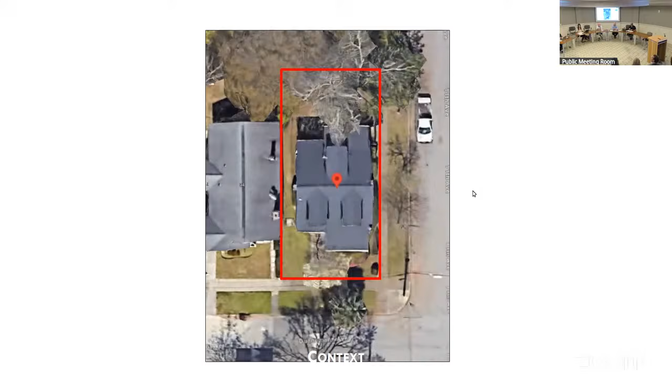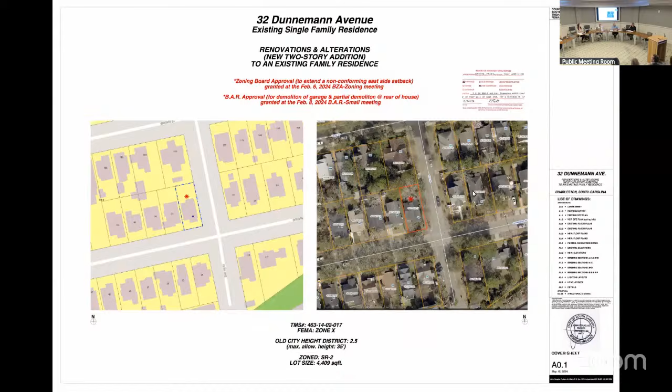This is the property on Dunnemann. Since this was after the fact, we've got a few photos from our code enforcement officer from when he did his site visit for his stop work order. And this is the condition as it was this morning. I've also got a copy — I'm not going to go through them, but I do have a copy of the approved permit drawings in case the board members need anything for reference.

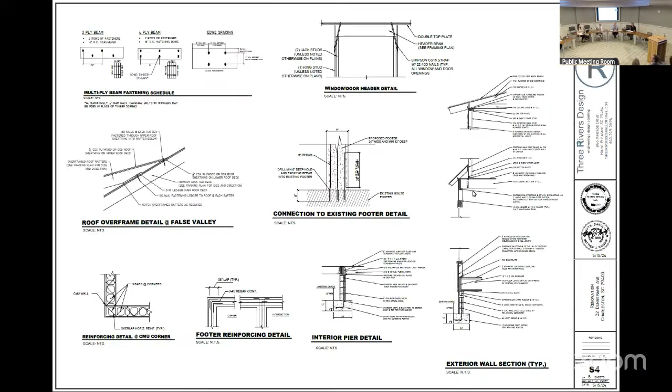You just want to skip over them to the applicant presentation. And I will turn it over to the applicant.

Hi, my name is Stan Dixon. I am the architect representing the homeowners at 32 Dunnemann. The sequence of events that has gone in play here — I want to start by just saying we have great respect for BAR and what you guys do and for Charleston, and had no intention to do anything other than to respect the original architecture of this

1957 bungalow that our clients had bought. When we came on board with this project, it had been before the BAR and it had gotten approval. A permit had been applied for and a permit had been granted. When our clients came along, they wanted to make some changes to the project. There was a previous architect that was working on this project before we started. When we started working on this project, there were some requests and changes that we made to the structure. It is completely built on the footprint that was previously granted, and it is essentially the same exact house that was previously granted for the first permit, and is the framing and the shape and the size and the massing of the house that received a permit.

When we got involved in this project, we reached out to the city, and we also reached out to the BAR, and we were told exactly what type of permit to apply for by the city. We did that. We followed their instructions, and we did get a permit to start construction.

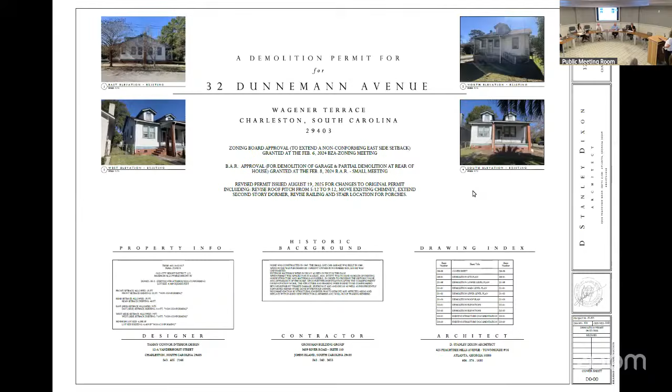Anything else to add to that, Karen? We do have... photos in our... You should state your name. I'm sorry. Lindsay Dixon, architect.

These are some photos of the house prior to our involvement, prior to demolition, and then photos of the termite damage and subsequent structural modifications done by the previous owner, where floor joists had been severed and were unable to be reused for the safety of the occupant.

Any questions for the applicant? I've got a couple. So when did you guys get involved with this project? What time, what year? I think it's probably June of 2020. Yeah, June of 2025, I believe.

And we were informed in August that the additional revised permit application had been approved.

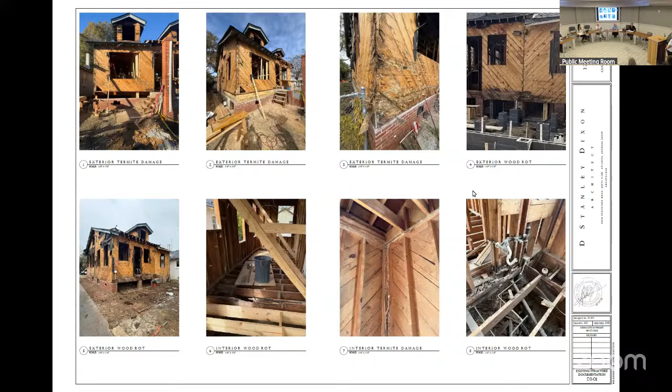Okay, and I don't think this project had aluminum windows. I'm looking at a photo from 2024 of wood windows. There were both some wood and aluminum. You can see on the upper floor, the second story was aluminum. The lower floor were wood windows, which we have used as our precedent to replace all the new windows with.

And so the drawings that we have show removal of all the siding, all the windows, the chimney. Was that approved? Yes, that was approved by the city to remove all of the exterior siding, porch, chimney. Okay, so we don't have the proposed drawings somewhere? The city approved it? No, sir. The building department approved it.

Excuse me, the permit was not issued because there are three departments that review: the building department, the zoning department, and the BAR. BAR did not approve. So you didn't have an approved permit. You had a building department approval.

But you didn't have a BAR permit. Confirmed yesterday, they didn't have a permit. They had a permit to do the original rear addition. Okay, it does belong to the demo in the rear. Got that.

Just clarifying, so the drawings that we have that show wholesale removal, I mean everything has been removed from this building, were not approved by the BAR. No, sir. Okay, that's all I need.

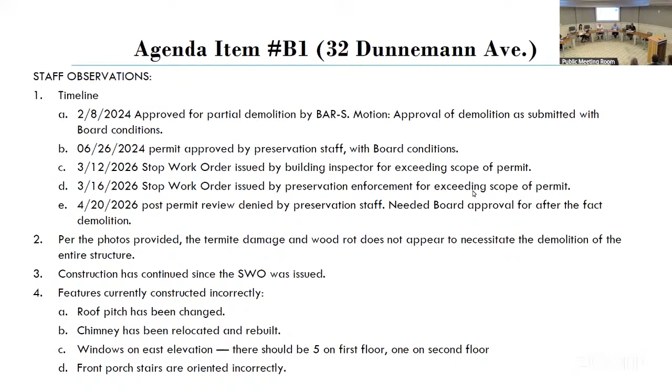All right, we have a motion on the floor for deferral to research the permitting issue. Do I have a second to Eddie's motion? I'll second. Bill, put the motion to a vote. Daryl, yeah, in favor. Eddie, yeah, in favor. Bill, yeah, in favor. The chair votes the majority, and the motion passes unanimously. Thank you all.

Agenda item 2, 399 Sumter Street. Frankie, if you'll give us an introduction overview of the project, please. Let me give you one second to finish it.

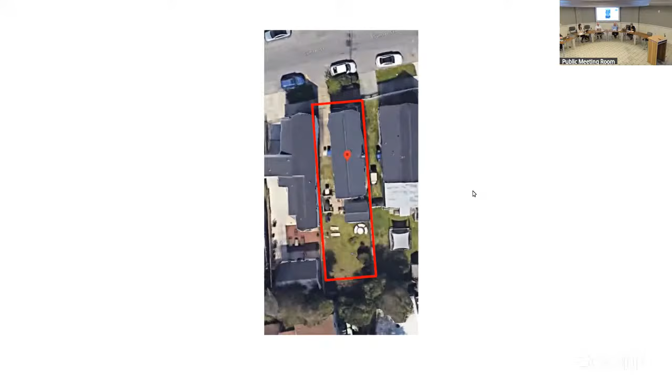Next we have 399 Sumter Street, West Side, Council District 6. It is a Category 4, Group 1, circa 1915 in the Historic Materials Demolition District, requesting an appeal of that decision for a replacement of 6 windows with Renewal by Andersen. This is the property's location on Sumter. I'm going to turn it over to the applicant.

The applicant here, I believe, with the applicant, he's my general manager at Renewal, but I thought Mr. Zawada was here. I am here. Oh yeah, I didn't see him. Did you want to say? Oh, I can present. Just something, if no one's here, I need to defer it to give you an opportunity to speak, so you don't have to say much. Oh yeah, Tom Zawada, I'm the homeowner.

Maybe we're just looking for a durable, well warranted, well reviewed window. Basically just looking for something we can open up during the fall and spring, so we can have open windows and let air in.

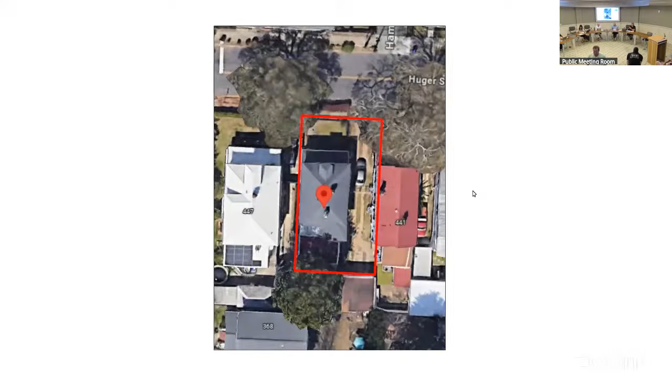This property's location, go ahead and go. You can go ahead and stand up, sorry. And I'll turn it over to the applicant.

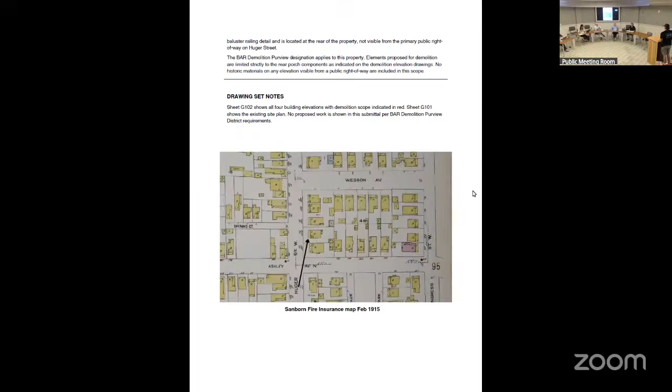I'm Ryan Sanders with Old City Builders. We're the builder for the customer. We're requesting to demo the existing columns here on the back porch, as well as the railings and pickets.

It's our opinion that they're not original. They're square 2x2 pickets, 4x4 post columns. This whole portion of the house is, in our opinion, not original. It's not the original portion of the house. So we're requesting to demo this area and essentially the shingle roof on that area as well.

We will be reusing those existing windows. So these two that are here, these are original. As far as I can tell, they're wood, single pane, putty glazed windows. So our plan is to reuse those.

Any questions for the applicant? Okay, thank you. Do we have anyone speaking?

Laurel Fay with the Preservation Society of Charleston. The PSC appreciated the opportunity to visit the site this morning, where we noticed that this demo area would be visible from Ashley Avenue. While we always encourage retaining historically open porch spaces, including the existing back porch, which was original, we acknowledge that there can be flexibility for alterations at the rear, and we appreciate that the applicant voiced the intent to salvage and reuse the 2/2 historic windows proposed for removal, and ask that that be included as a condition. Thank you.

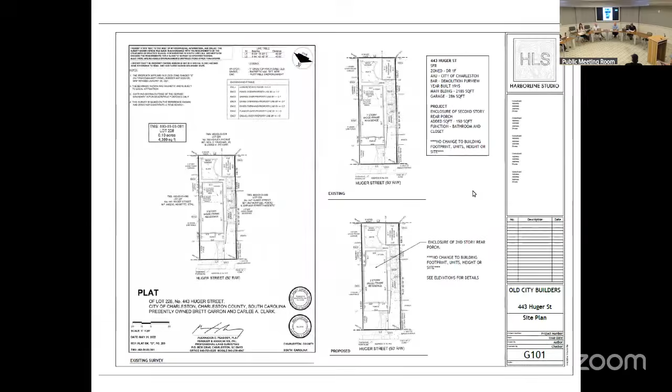Staff observation: request includes demolition of its existing second floor rear porch elements, existing wood baluster, porch decking, exterior wall framing, and trim, while the rear eave is being removed from the drawings. It appears that the porch roof is not included in the request.

So this doesn't appear to contain any approval to interact with the roof fabric. Area of demolition also appears to be later than the structure. Staff condition for approval: if approved, project would need to wait the 30-day appeal period before the permit can be issued. Staff recommendation is approval as submitted.

Thank you, Frankie. Did you want to respond to or clarify anything in the public comment or staff comments and recommendations? As far as the roof fabric, in an ideal world we would pull the shingles back, but if it's desired by the BAR we can build on top of it and leave the existing there. The framing will stay there, the sheathing will stay there. But as far as the shingles go, we plan to remove them, but if it's desired to leave them in place, we can as well.

You're just gonna do an over-frame. Correct. Thank you. All right, public comment and the applicant's presentation is now closed. We'll move into board discussion and a vote.

If you crane your neck, you can kind of see it from Ashley Avenue, but it's not strongly visible. The demolition is to the rear, where we usually like to see it. I think the porch has kind of lost a lot of its integrity with the infill of the downstairs porch and the one-story addition put on the back. So I'm comfortable with this, and too, I think the impact to the street, public right of way, is minimal.

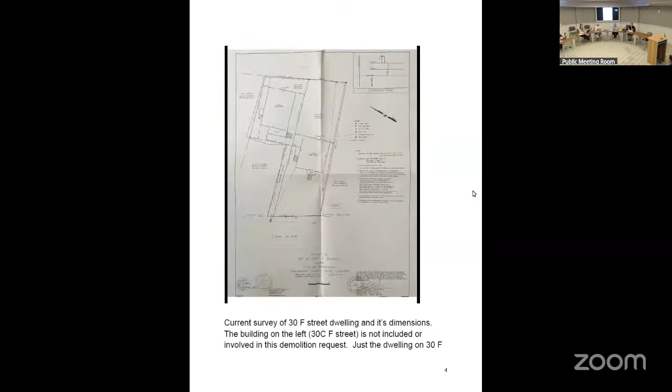I just have two observations. One, staff did verify that our information was that there was a structure that dated to 1974, which is what put it under purview, and staff typically does not support full demolition. However, if the board does decide to approve, the project would still need to wait the 30-day appeal period as required by ordinance.

Since staff does not support full demolition, our recommendation is a denial as submitted. But I know there were some comments. Thank you, Frank, did you want to respond to or clarify anything? Yeah, before we move into board vote.

I don't mean to - I'm sure your staff does a great job, but I'm a little confused on the '74, with all the paperwork that I have. And that's not just me, that's people that work at Sanborn and everybody. I know there was a home on that site, but it's in a totally different position. I don't think we're talking about the same one.

That's all I can say, I guess. So to add on to that, and I don't think it's gonna matter, but the article I'm reading about five zoning ordinance variances approved says construction of a one-family dwelling at 30 F Street, which I assume is this house. Do you think that was approved? That's 1974. And so that was a house that was lost in Hugo, is what you're saying.

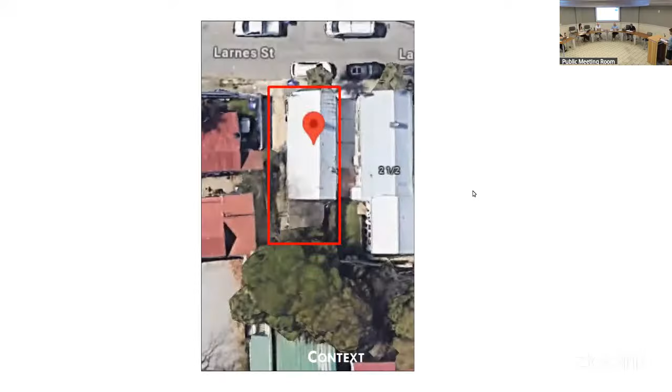And item 5 is 2 Larnes Street. Frankie, if you give us an introduction overview of the project. Okay, 2 Larnes is in West Side Council District 6. It is a category 4, circa 1905, in the Historic Materials Demolition District. They're requesting approval for partial demolition of exterior elements visible from the public right of way. Here's the property on Larnes Street, and I will turn it over to the applicant.

It's not lost on me that this is not something you guys typically would approve. However, due to the significantly small nature of the lot size, we're really very limited in what we can do to make this a practical, useful space — it's essentially a one-bedroom home. The homeowner is working every which way to try to make it a little bit more useful. So that being said, the demolition is confined to the rear of the structure, preserves the large majority of the historic relationship of the cottage and its relation to Larnes Street. As I've mentioned, the demolition has been intentionally minimized to the best of our ability.

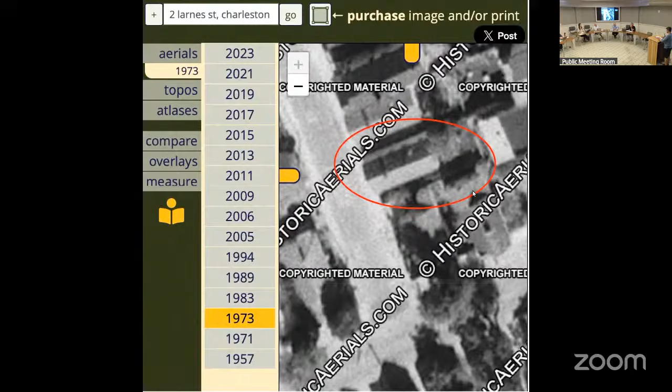Okay, so staff had some observations. The request includes demolition of a porch, siding, trim at the rear, and a portion of the roof. The existing structure is a Freedman's Cottage. The request is to the rear, but due to its location, the rear is visible. We noticed a discrepancy between the drawing and the photo request — we think the entire rear elevation is requested for demo.

Is that correct, the rear-facing side? The rear side, yes. I think there might have just been a drawing error, or an error between the drawings and the photo you marked up. Okay, staff is not opposed to the removal of the screen porch.

We are concerned that a demo request would require removing the entire roof, as applicants have stated before that there's not a way to splice into the historic roofs, the terne metal roofs. Staff has previously supported small portions of demolition at roofs such as this for dormers. While staff doesn't support roof demolition, if the board were to approve, we think it should be pulled away from the rear chimney.

Also, if the board were to approve, the eaves and the rear corner board should be retained in the same project. If approved, the project must wait a 30-day appeal period prior to us approving. Staff recommendation is a denial.

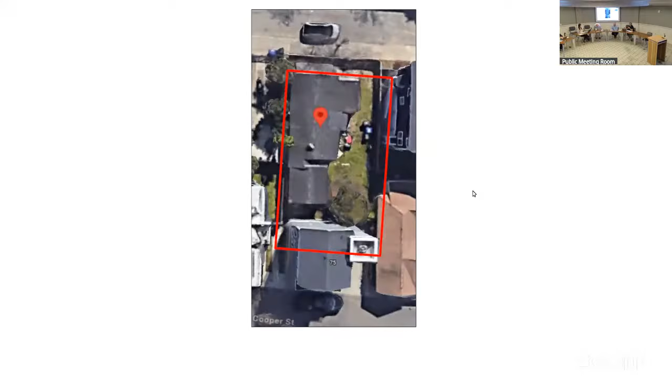Eight Shepherd Street is in East Side Council District 4. It is a category 4, circa 1920 property in the Historic Materials Demolition District. They are requesting full demolition of the existing dwelling. This is the property's location on Shepherd. And I will turn it over to the applicant.

Is the applicant here for 8 Shepherd? Yeah. My name is Robert Shipley. I'm the architect and probably the builder. The client bought this property - he actually lives right next door and looks right out at it.

When it came up for sale, he wanted to buy it, and he knocked it down. It's in pretty rough shape - I guess you went out there today and looked at it. I told him it could be charming if we fixed it up, made it a nice little place. He did a lot of work - I don't know if you looked underneath the crawl space, but it's used like bricks and concrete block, floors all over the place. So it would be better to just knock it down and build a nice new home there.

Any questions for the applicant? Thank you. Good. We have anyone speaking from the public?

Hello, everyone. I'm Antonio Coxum, representing the Eastside Community Development Corporation and its board. We have our president in attendance right now.

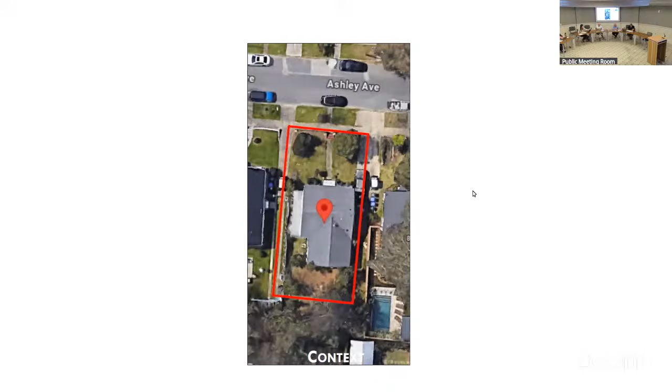872 Ashley is in Wagner Terrace, Council District 6. It is category 4 in the architecture inventory, circa 1940, demolition district. This project is requesting an opt-in review for demolition of existing exterior elements visible from the public right-of-way and conceptual approval for a proposed addition. This is the property's location on Ashley Avenue, and I will turn it over to the applicant.

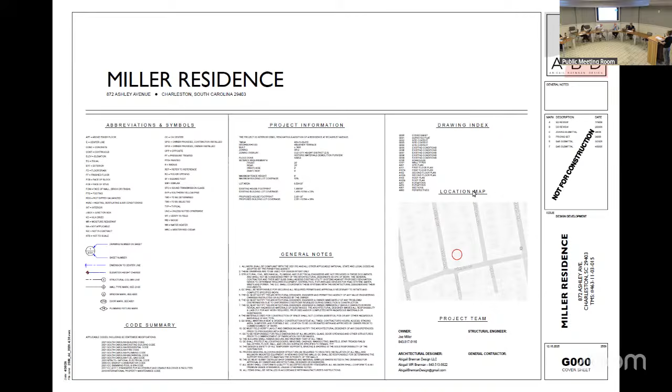Good evening, I'm Abigail Brennan, the architectural designer speaking on behalf of the owners, Joe and Rebecca Miller. This property is a typical lot within Wagner Terrace.

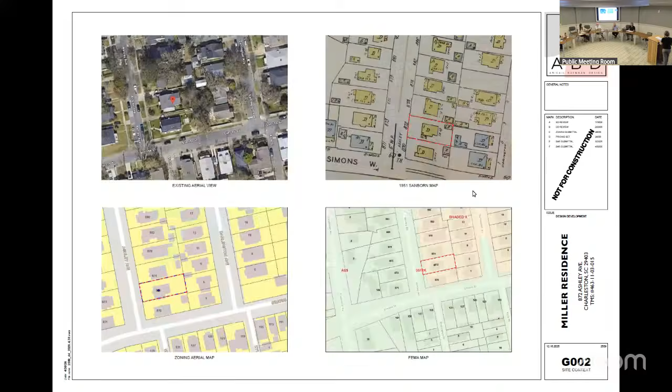The existing structure has undergone alterations over the years, including vinyl windows, aluminum siding and trim, and a metal awning at the front. We are proposing to remove the aluminum siding and restore it, replacing in kind with the existing wood siding and trim.

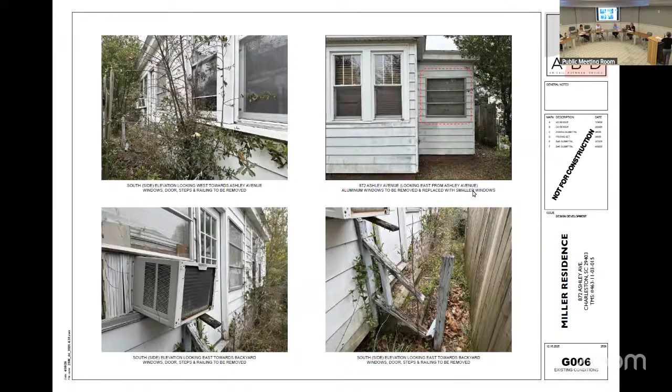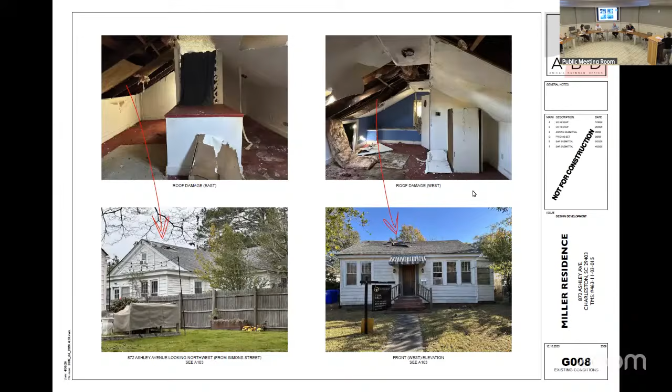These photographs once again show the extensive roof deterioration and water intrusion throughout the structure. We are proposing a modest single-story addition in the rear.

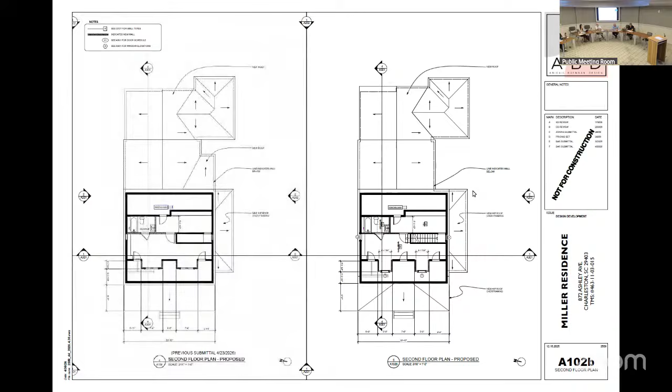In plan, you can see that this was the original width of the dormers, and now we are making them narrower. The proposed dormer area that we're modifying is 8% of the historic roof.

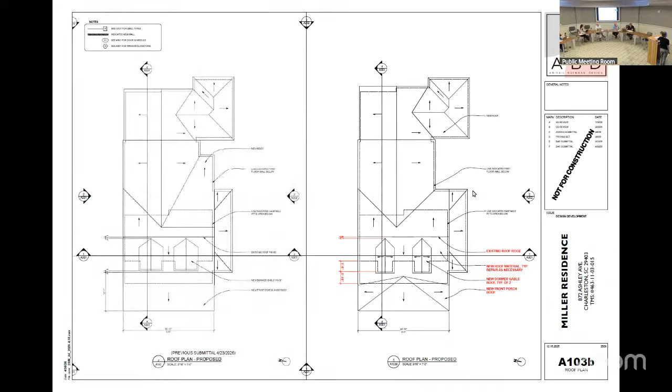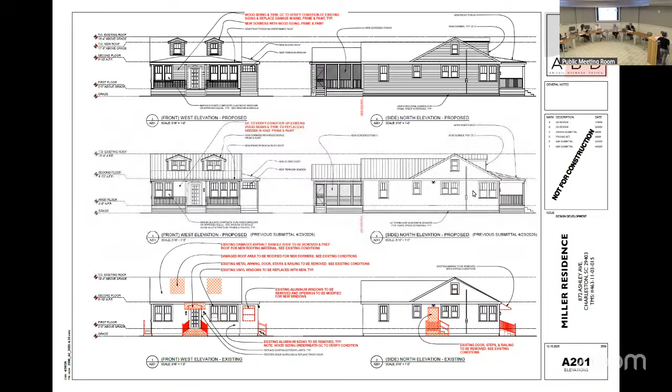And then we have exterior elevations. In response to feedback received at the previous meeting, we reduced the width of the dormers to create a more modest appearance. They remain pulled from the roof edges and below the primary ridge line. We also revised the front porch to make it a hip roof, creating a lighter and more subordinate appearance. The rear addition remains clearly secondary to the original structure, with the new roof tucked beneath the existing eave. The side elevation also shows the lower roof line, highlighted in pink, though it's hard to see, but it occurs right here in the addition with the low roof.

And then we have section drawings, and perspective drawings showing how it transitions.

Our goal is to preserve the character of the original bungalow while making it functional for a modern family. The addition remains subordinate to the existing structure while creating a more welcoming and engaging presence on Ashley Avenue with the front porch.

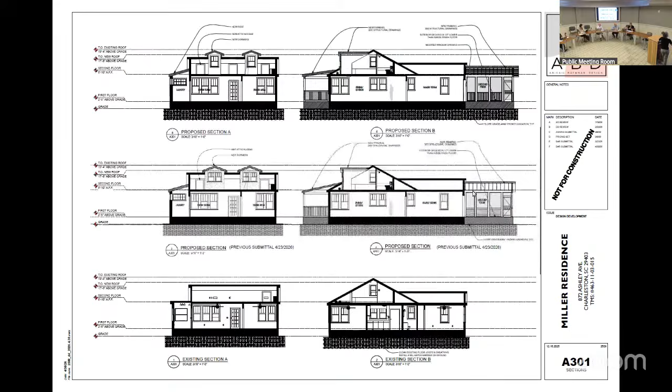First of all, thank you for the excellent submittal. It's probably in there and I missed it, but can you explain what the new porch you're adding, what the base is? Is it just slats of wood or something else? It'll be block. So there'll be piers, but with wood slats that'll be continuous across the front, that's what you'll see. So we're playing with a very simple front porch, nothing like brick piers or anything that are gonna be visible, just keeping it small, minimal, modest. Thank you, just wanted to be clear on that.

Thank you, any other questions? Thank you. Do we have anyone speaking?

Laurel Fay with the Preservation Society of Charleston. The PSC is pleased to see the improvements to this design made possible through the opt-in review process. We appreciate the responsiveness of the owners and applicant to our feedback regarding opportunities to draw from neighborhood precedents to inform the design approach, and we look forward to seeing this house receive much needed preservation attention. Thank you.

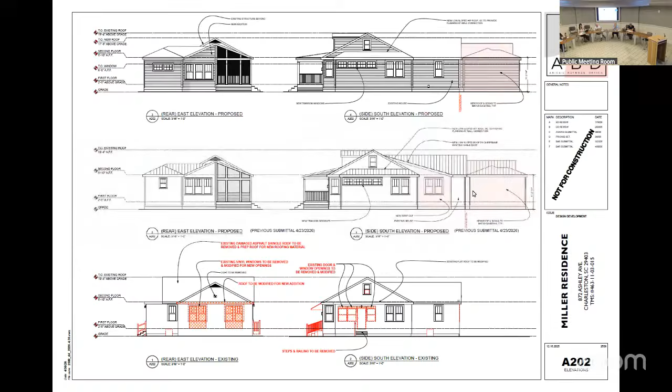Frank, you have the rest of these staff comments and recommendations, please. Staff just have observations for previous board motion: the approved dormer size and proportions have been restudied and the bump out has been eliminated. Staff has no additional comments, so we are recommending approval of demolition and conceptual approval with preliminary final review by staff.

Thank you, Frankie. Ms. Brennan, do you want to respond to or clarify anything raised in the public comment or the staff comments? No, that is okay. All right, public comment and the applicant's presentation is now closed. We'll move into board discussion and a vote.

You did everything we asked. I think it's improved greatly. The elimination of that bump out on the side has gotten rid of that really awkward ski slope roof configuration, and I think the hip roof on the porch has helped a lot. I think you've also beefed up the columns on the front porch, it looks like.

They're more substantial now, so I think everything's moved in a very positive direction. I'm in agreement with staff, I don't have any issues. No, I think it's great. Daryl, do you want to make a motion?

Make a motion for conceptual approval with preliminary and final by staff. I'll second. Okay, so your motion was approval of demolition, and conceptual approval. Thank you, Daryl, and thank you, Eddie, for the second. Motion to vote: Bill, yeah, in favor. Daryl, yeah, in favor. Eddie, yeah, in favor. Chair votes the majority, and the motion passes unanimously. Thank you.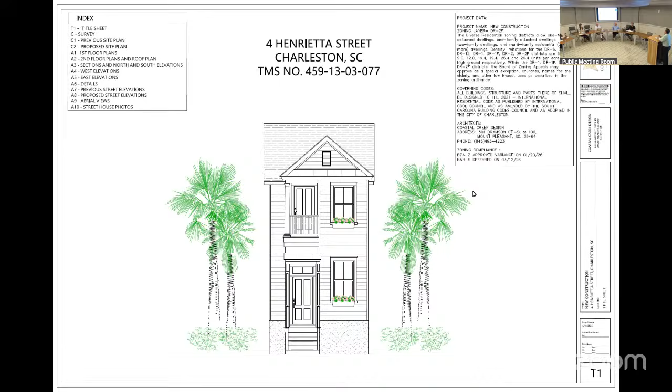That's the current proposed front elevation. Here was our previous site plan that you reviewed, and we had basically just two masses: a front piece and then this long finger going through the back. We have revised that and created a house that reads, I believe, as three sections as it extends to the rear. There was concern by one of the neighbors about how deep the house was.

So when you look here on this current proposed, we've shifted everything forward 5 feet 4 inches further off of that rear property line to address that comment. We skinnied this thing up and removed that variance request that took us 8 months plus to get, so that we could do tandem parking versus parking in front.

When we look at this, we are still looking at trying to create the image of a double piazza on the front. We had a single front, quote unquote, front porch on the previous design. You'll see that the house is a little more slender, a little bit longer, but it's definitely still pulled forward. Those cars will park on that left-hand side.

One of the concerns was also size, scale, height of the house. The size of the house was taken out about 137 square feet in the overall footprint—footprint, first floor, second floor. And we reduced the height, as you'll see as we get to those elevations, by about 2 feet 3 inches, basically taking our first floor from 10 feet to 9 feet, second floor down to 8 feet. Changed that roof pitch to pull it down.

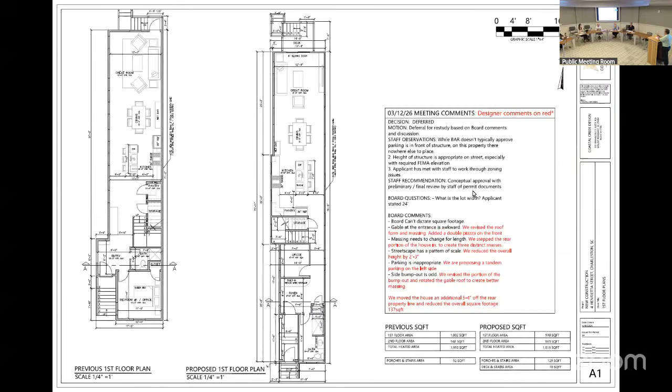So the first person that spoke, I guess I'm confused as to the parking issues. I know that's not your purview, but there was a duplex next door to it as a single family residence. Just because this lot was used for parking doesn't mean that it has to remain parking. We're providing the required parking for the structure that we're proposing, and did not increase the square footage.

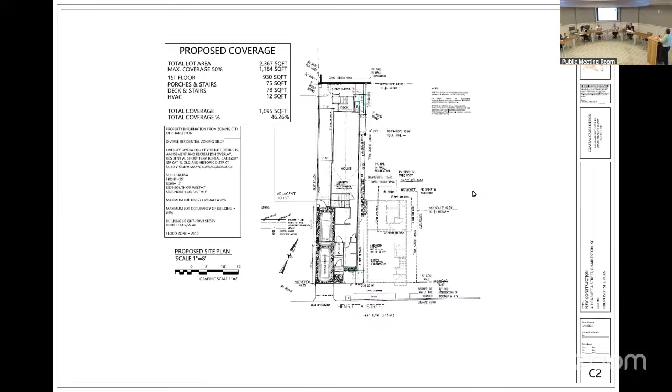The house that we're proposing is 1,800 square feet. When we did our presentations to zoning board at previous meetings, we had documentation that showed the square footages of the houses around, and this house is appropriate in this neighborhood. She may have cited the small houses on her side of the street of Henrietta, but when you look at the other houses, the house at 6, the house at 10, and the houses on Elizabeth Street, this neighborhood is not full of houses that are 1,000 square feet. We have a lot that has a TMS number that is allowed to be built on.

I think that we took the board's comments from that first review of this. We reduced height, we reduced the width, and I'm certainly willing to restudy the piazza if we need to. But I think that the house again takes its cues from the neighborhood as far as the detail.

Thank you. All right, public comment and the applicant's presentation is now closed. We'll move into board discussion and a vote.

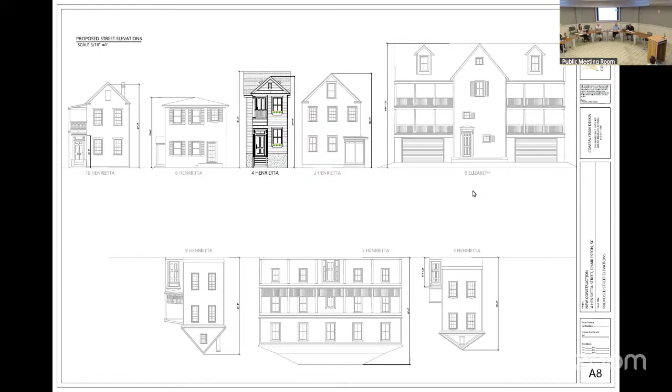Thank you. Agenda item 9 is 3 Savage Street. Frankie, if you'll give us an introduction to the project.

3 Savage Street, Charleston, Council District 8. It is not surveyed, circa 1890, in the old historic district, requesting a conceptual approval to elevate the building, site and fenestration alteration. Property's location on Savage, and I will turn it over to the applicant.

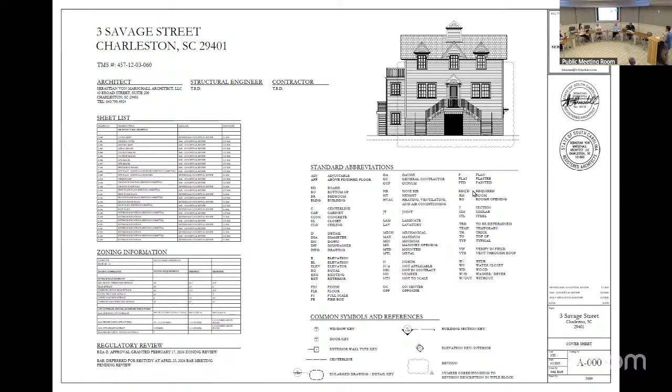For conceptual review of the proposed renovation at 3 Savage Street, the board will remember this project was reviewed at the April 23rd meeting. The house is a former carriage house dependency for a different structure it backs up to, as you can see in the old Sanborn maps. There was an early 20th century house on Rutledge Avenue, and the carriage house beyond that.

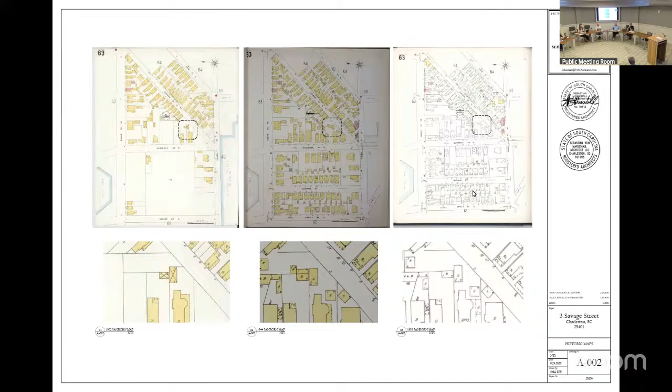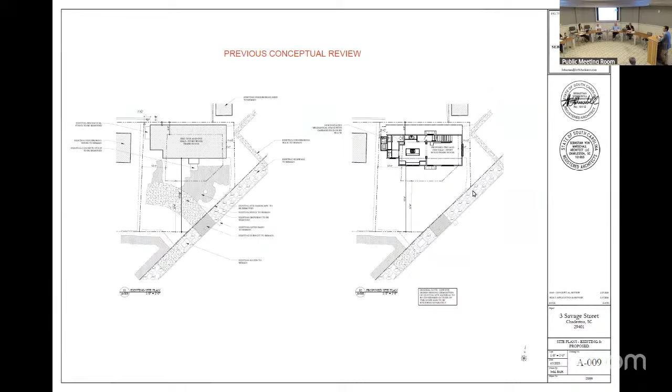You can see some aerial images, site and context pictures of adjacent structures, and the house itself, including the front door aedicule, which was the crux of our conversation at the last review. You'll see our previously approved and proposed site plan, which shows the major modifications we discussed that address the majority of the board and staff's comments, namely the location of the front door and the treatment of the historic front door material.

You can see the site here. One thing that was discussed was the amount of space, and in further study we determined there was sufficient room to add a stair on the front of the house, which allowed us to solve a lot of the other issues that came up during the previous meeting.

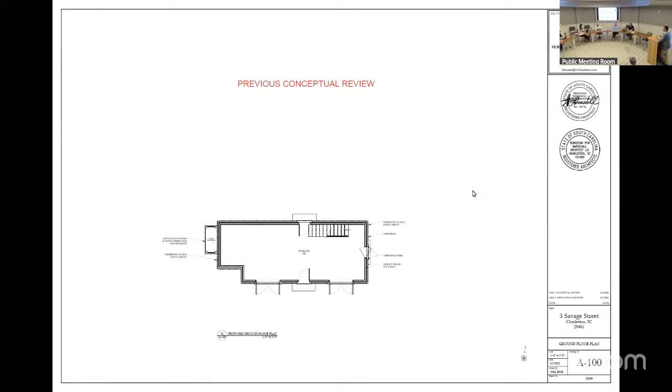Here you can see the height comparison of our proposed structure, which even elevated is well below the adjacent buildings. Previously approved ground floor versus revised ground floor, with the stairs on the front of the structure. Previously reviewed versus the first elevated floor with stairs.

I'm going to skip through to get to the elevations, since they tell part of this story. This was the previously reviewed version of the proposed scheme. We had talked about relocating the original front door over to the side facing Savage Street and replacing it with a new door on the south side.

The proposed version keeps the existing historic door in its location on the house. When the house is elevated, stairs and a front stoop would be added to handle the vertical change, avoiding the complexities of an internal stair. It also preserves the historic material on that side of the house and the door aedicule, reinforcing the narrative of the evolution of the house through this renovation and elevation.

I think this is probably the best elevation, but I'll quickly flip through some others. Previously reviewed, you can see where that aedicule had been moved aside, and now we're proposing a new side door that's compatible with but not competing with the original. On the rear elevation, we're still proposing a door on the north side for access to the area below the house in the elevated space, with the door, window, and stairwell above.

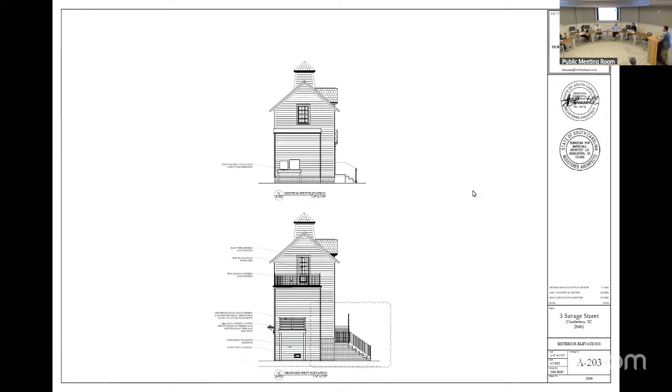We have letters of support from the neighbors, which were added to the record at the last meeting. We also shared our revised drawings with the preservation groups, and we're generally very comfortable with the direction it's going. I welcome any comments, and thank you for your time.

Questions? Can you help me understand, Sebastian, where it's being moved? I didn't really understand the change. Yes, sorry, let me quickly back up to our site plan.

This went through the BZA, and the house currently sits very tight to the north property line. Because of the elevation and its impact on surrounding structures, and other concerns, the proposal is to shift the building south to meet the north setback zoning requirement. This lot is extremely challenging, so there was no way for the structure to meet all the setbacks, but we tried to help it meet at least two, north and south. This also gives relief to the neighbor on the north because of the added mass from the elevation, and it helps with drainage and buffering.

I went out there today, there's a big tree right there. Are you going to have to cut the tree? No, we're not able to cut or move large trees around it. Okay, thank you, I just wanted to clarify that.

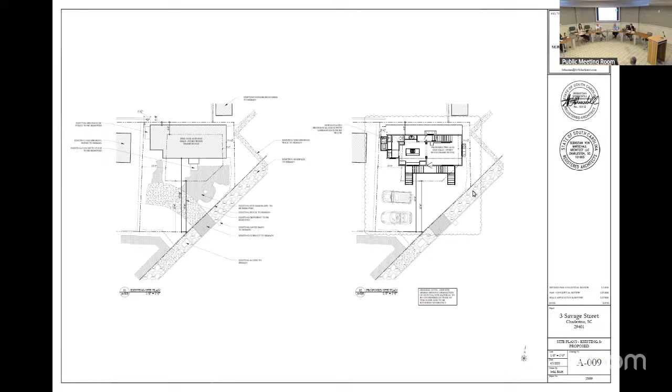Staff just have the observations that previous board motion and comments have been addressed, and staff has no additional comments. Staff recommendation is conceptual approval with preliminary and final review by staff.

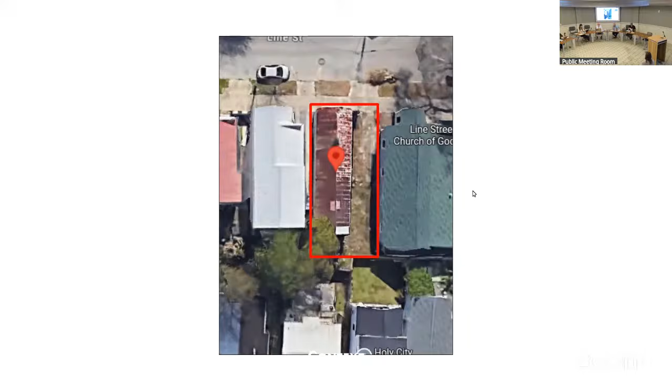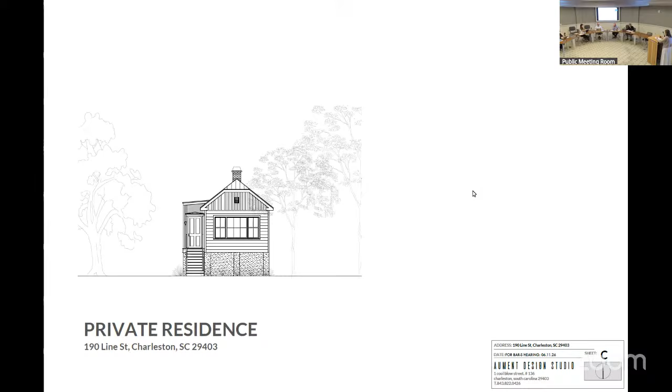Hello, I'm Amber Aument and I am representing the owner at 190 Line Street. I'll start by saying I was approached in April to take on the reconstruction of this structure. I was really reluctant to do so, given this storied past. However, meeting with the new owner, I felt this parcel finally had a good steward, one who was committed to replacing the cottage as it stood. And that was a project I was very much interested in and lucky to be attached to. So on C1, these are images taken before the structure was lost.

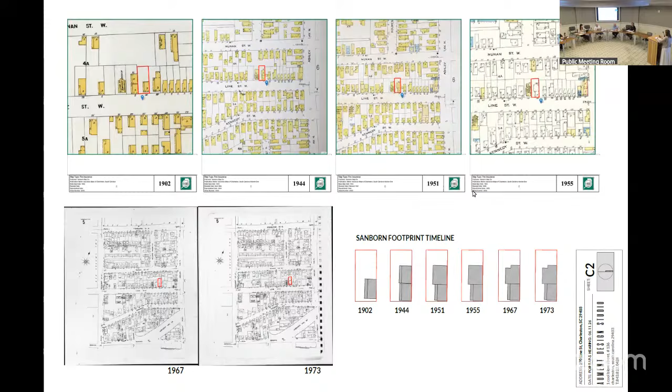Here are Sanborn maps that South Carolina Room researchers helped me find. You can see there was quite an evolution of footprint over the span of the structure. From 1902 to 1973, it really grew in form, but what always remained present was the gable facing the street and the side piazza, which was present in the last batch of photos we have on record. So that is what we are aiming to reconstruct.

Here is a submittal timeline, both pending and previous board hearings, so you can see those decisions. Again, I was approached in April, shortly after the last time this was before the board, where the decision was denial based on an insufficient submittal.

The proposed submittal strategy presently is to recreate the footprint based on the Sanborn maps and to utilize the inventory from the SOS survey, where there was a very impressive documentation of materials and massing.

The fenestration along the piazza was boarded up before the structure was lost, so these locations are speculative and made on the basis of rhythm and repetition between the column bays. The remaining comments from previous hearings have been addressed to my best ability.

Here is that extensive inventory done by SOS Charleston. This was really crucial in how I approached reconstructing this structure. It was really prescriptive - the work was done for me, really. They also had some additional photographs that helped support that documentation.

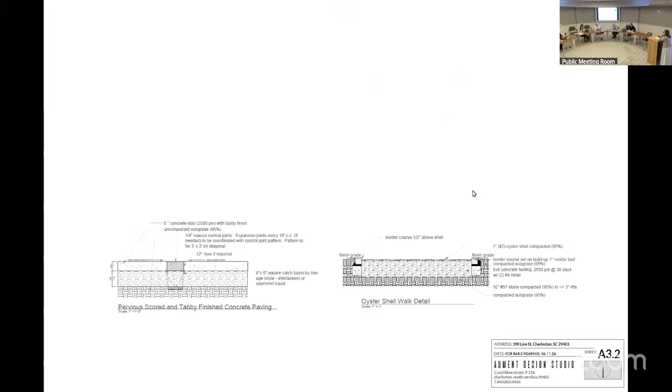So you don't need breakaway walls if it's just in an AE zone, it's not in a V zone. So then we would just have continuous stucco. Yeah, I didn't realize that was going to be one of my comments.

This is a comment for the board. Did the board say to push the piazza back from the original? Because it was originally 8 inches off the facade. Is that something the board said before? I think this is the first time we might have a complete application, so every time we've said that, you're piecing it all together. That's right. Every time we've said come back.

I can help a little bit. It was not something the board got far enough into. Okay. Amber did talk to us about it and we said, you know, so that was sort of a speculative thing. I don't really know. Okay, that's all, I'm just curious.

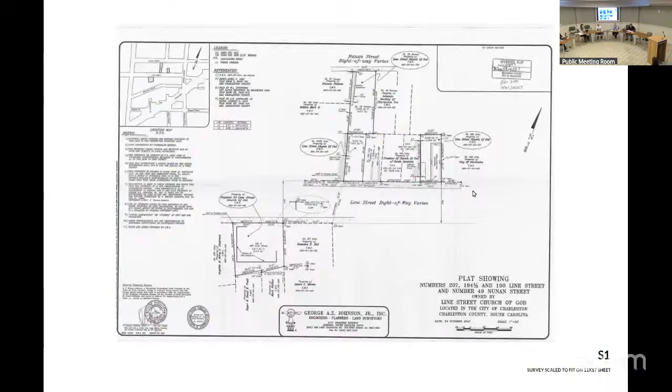Anyone else speaking? Frankie, give us the staff comments. Staff have the observation that we appreciate the attention to detail in the new submittal package and believe that the current submittal accurately reflects the previous structure while meeting the code requirements for elevation. Since this was a code case, we would need the board motion to include a timeline for submittal of permit documents. Nothing to do with Amber or the current owners, that's just standard practice given how this all started.

And so I wrote this very carefully and I think I've got this right. Staff recommendation for the motion is a denial of after-the-fact demolition, but approval of drawings for reconstruction with staff conditions. Did you want to respond to or clarify anything in the public comment or staff comments?

Explain to me the timeline of submittal. We have been told that whenever we have a case that has a code case component, the board has to set a timeline, whatever they deem necessary, for a new submittal to come back. It feels kind of silly in this case, but we don't have to see it back. No, I mean like for submittal of the permit or whatever her next step is, it just doesn't rest in limbo.

That's it. All right, public comment and the applicant's presentation is now closed. We'll move into board discussion and vote.

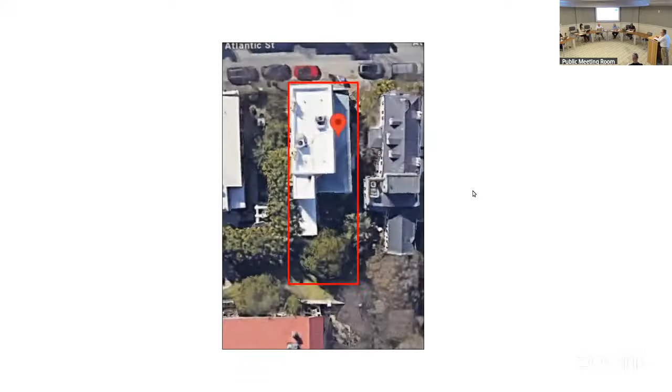Agenda item 11 is 6 Atlantic Street. You'll give us the introduction and overview of the project, please. Hello, we wanted to introduce this, it's 6 Atlantic in Charleston, Council District 8. It is category 3, circa 1830, in the Old Historic District. They're requesting conceptual approval for renovation and addition to the rear structure.

Project location on Atlantic. I will turn it over to the applicant. Who's gonna go first? Well, just a little bit of background. So we did get approval from BZA for a hardship of insufficient kitchen, really, if you look at the plan of this house, it doesn't really have a kitchen commensurate to a house of this size. But that was in December.

And then 6 weeks ago or so, we presented basically the full program that the client wanted, and this is essentially represented here on the front page, which included the new kitchen. There's also this pantry area, which was commented on during the review.

So these two elevations show the revisions in response to the last BAR review, where we basically removed the porch enclosure pantry area, and also we're trying to make the

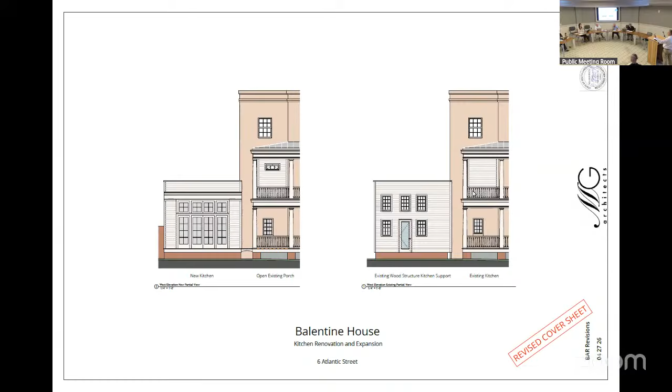building... the original building was there for a long time. It's on the Sanborn maps from 1888. It's probably been worked on, it's not a pristine building, but its scale - and that's been commented on by the Historic Society and other people - is basically what it was. There were comments to try to preserve that profile, so that even looking at the new building you could start to see the historic condition that existed there.

This is the site, and these are views from various places.

The basic premise - or it's not a premise, it's what you really experience when I went there and looked at it, more than once - is that from Atlantic Street it's really negligible what you would see. I took a telephoto in one of the pictures and you can see something.

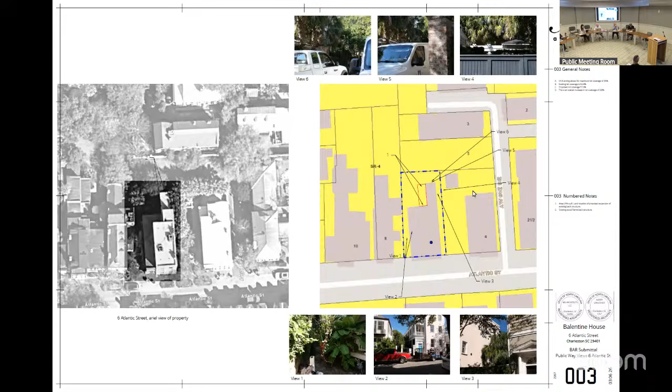So from the street, a casual view, there's not really going to be much visibility of that. From Zig Zag Alley on the backside - if you go here you don't see anything. From this view, this little back area, you see a little bit of the side wall, and that wall will be a little bit bigger than it was before.

So these are more views of that. Just so this is the lot coverage. Here's another one of these.

Okay, so this was the original condition. This is the two-story wood structure. This is the masonry annex, original to this building, and this is the wraparound porch. In the original proposal, we had this area here that enclosed a portion of the porch - we are removing that right now. This shows the portion of the back building that we're expanding out to make a kitchen.

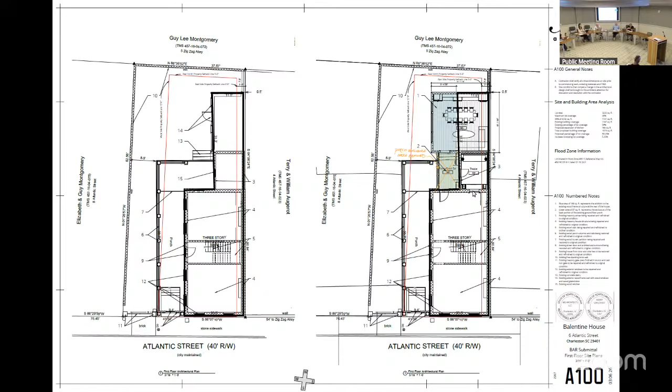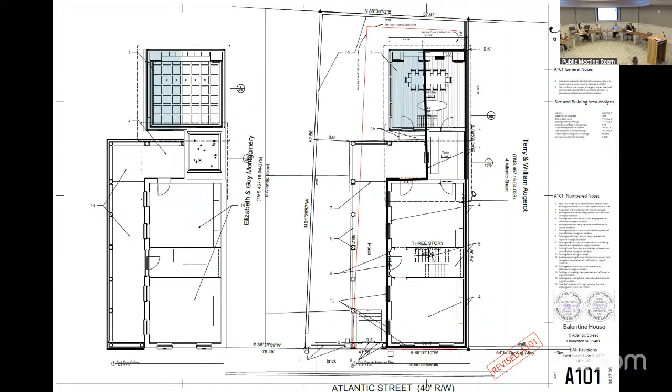This is showing the same thing with the reflected ceiling plan. And so this shows the new condition, where that's the ceiling of the thing - this is the ceiling of the porch, that's the ceiling of the pass-through here. Again, the porch is open. This is the addition, this is the existing masonry.

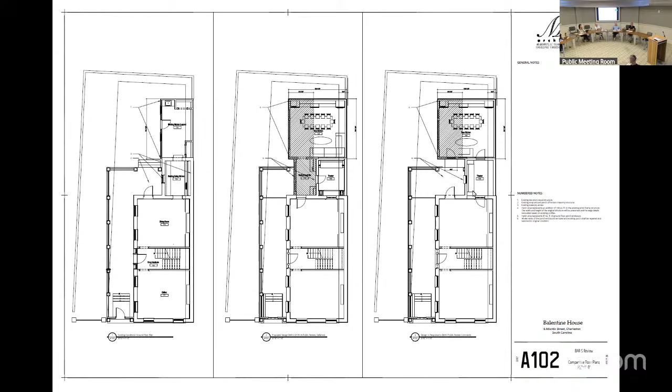This is just showing, in comparison, straight across: the existing open porch, existing wood two-story structure, existing brick annex. This is what we had, this is how much area we were adding, this is the pantry area. We've taken this away - this is all now just being restored as is. We're not doing anything else, all we're doing is stucco, windows - everything that's there is being restored. We're making one move, and that's moving that wall over to enlarge that space.

This is the roof situation. So this is the original - again, the two-story annex has a low slope roof, this has a low slope roof, this is the wraparound porch. This was our proposal - this is the part that's disappearing because that had a lower roof that slipped under. We were trying to make a nice relationship with the porch. And then this is what we have now.

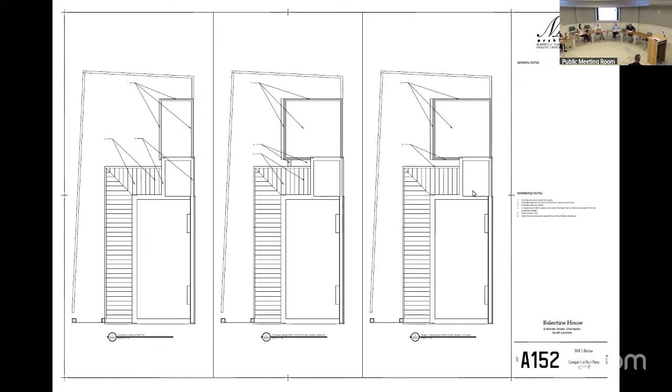So this building is separate. It has a kind of a gap here from the original building. So these are the elevations in order.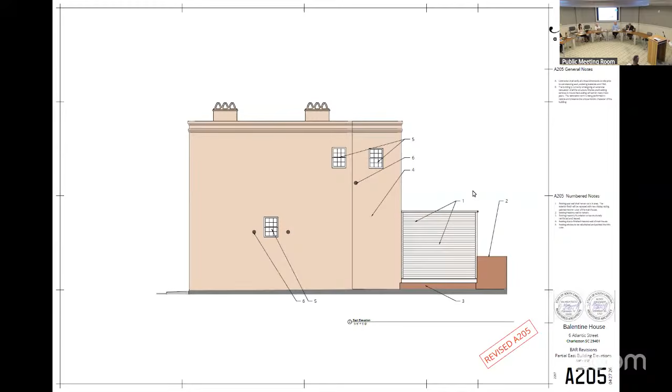And this is a view that I created. It's accurate in just showing from the gate what you would see. And it is important that we do have its existing screen on the porch, which we are going to keep and actually restore. It does provide a real screen to the back, but it's there.

Any questions from the applicant? You know, one, your addition, the flat roof portion, how are you draining that roof? I think we're going to drain it to the back. It'll be a flat roof, sloped chord trusses. So there's probably going to be a drain. There'll be a parapet, maybe a scupper. I think we're going to do a through wall scupper. That'll probably be on the north side. Because then the draining will be on the property.

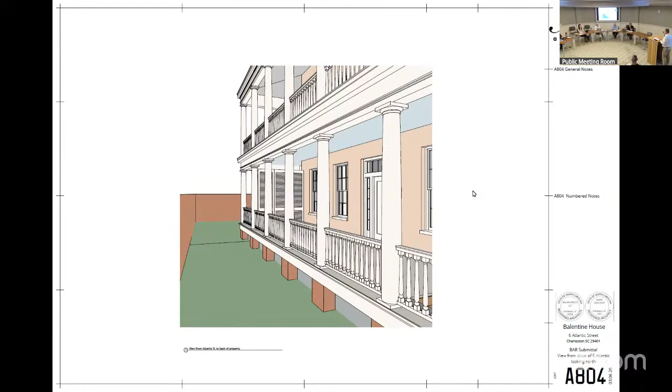Any other questions? Do we have anyone speaking from the public? Can you give us any staff comments and recommendations?

I've just had some observations, and I will apologize to the board because I was reading my notes earlier and I misspoke. It's category 2, not category 3, my apologies. Massing of the addition has not been restudied as per the staff condition which was adopted, but a hyphen has been added per board recommendation. The piazza enclosure has been removed from the request.

The rearmost addition is still demolishing the facade of the existing structure, which dates to 1888 per Sanborn maps, and has existed with these dimensions since then. Since the property received a variance, you can review the entire proposal regardless of visibility from the public right of way. And I do have my ordinance there.

Staff recommendation is a deferral for restudy, as not all of the previous board discussion and motions were met. But I was really just trying not to go against the previous board motion, so I will leave it up to you to determine if it meets your previous motion and requirement.

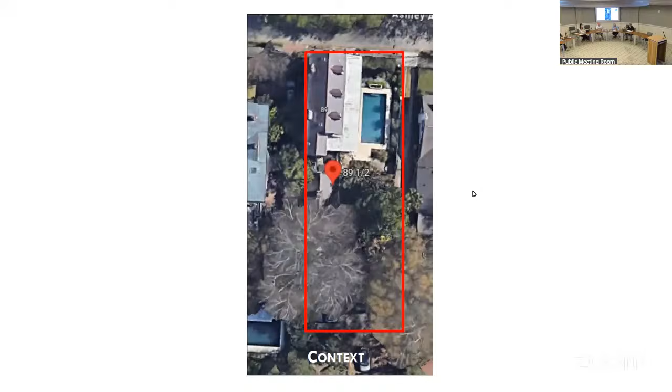Avenue, it's in Harleston Village, Council District 8. It is category 2, circa 1838, in the Old Historic District, requesting final approval essentially for a material change to the second floor balcony of the rear carriage house. This is the property's location on Ashley, and I will turn this over to the applicant.

I am Laura Altman, LFA Architecture, representing Mary Howell at 89 1/2 Ashley. This project is the rear building to 89 Ashley, positioned to the west. The part we're talking about is this porch, a one-story porch with a second floor open deck. According to the BAR architectural inventory, both buildings were built in 1838, the main house, and both appear on the 1852 Bridgens and Allen map, leading us to believe this was a dependency built at the same time as the main house.

The 1902 Sanborn map lists the house as a dwelling with a porch. That same porch appears on the 1929, 1944, and 1951 maps, but not on the 1955, 1967, and 1973 maps. There's evidence at the interior that the original porch was actually a cantilevered awning or deck, since the original interior portion of the joists are still in place. So that original porch was demolished sometime between 1951 and 1955, and the existing porch was likely constructed in the 1980s or later.

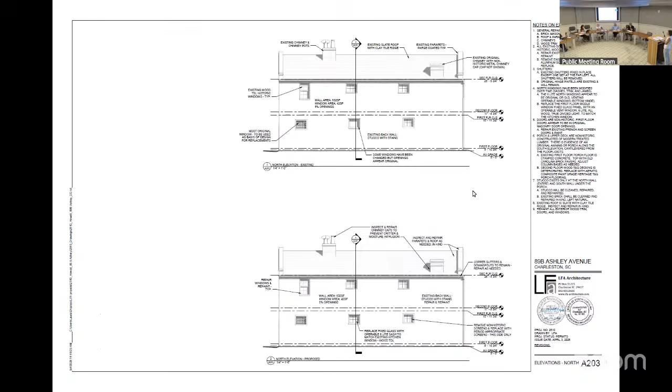It's all treated wood, and that's why. And modern dimensional lumber. And just that it's not on the Sanborn maps.

Yeah, that's what I was looking at. I did some early research on this project when I was first starting. I looked at the BAR file and I thought I found the 1980s application, but then I don't have it in my saved files. So, just looking at it, we know that it's modern dimensional lumber, just 2x12s and all. And then the original big joists are still inside, and definitely not cantilevered anymore or anything.

Any other questions? Thank you. Do we have anyone speaking from the public?

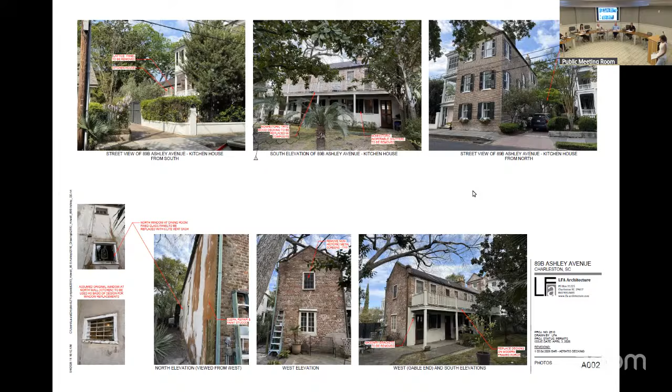Okay, Frankie, you could give us any staff comments and recommendations. Observation: that request is for composite material on the house balcony. Staff can't consider a composite material to be a replacement in kind. And while minimally visible, it is visible, unfortunately, from the right of way. We checked, we were going to sign off on it, but it was visible. Some elements, as Laura was saying, have already been approved and handled with staff as they were either not visible or a true replacement in kind.

We're only looking at the...

Did you want to respond to or clarify anything? I guess I will point out one thing that was in the brochure from Aeratis, that this product has been approved in a lot of states for in-kind replacement per their brochure. So again, I feel like it's a good replacement that is a better product in the long run. It will be more durable.

Thank you. All right, public comment and the applicant's presentation is now closed. I'll move into board discussion and a vote.

I don't really have an issue with it. If you put treated lumber up there, it's going to cup. When you put it on a covered piazza, it cups, it's going to cup really bad on that, so I don't really have an issue. Once it's painted and considering the distance back from the street, I don't see an issue. I think if this was a historic piazza and they were taking—which again is still problematic—putting treated wood like ipe or something.

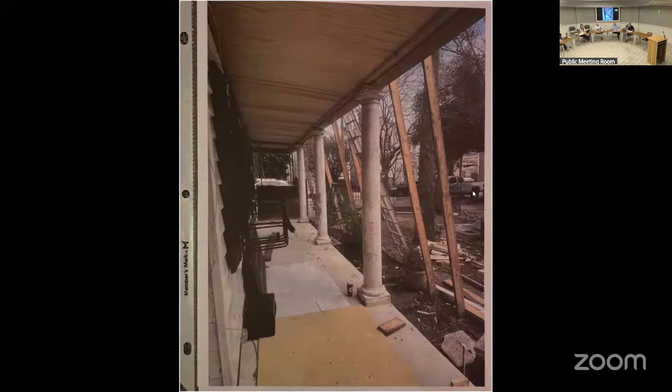Frank, you could give us city staff comments and recommendations, please. I only have the observation that staff denied a permit due to it being fiberglass columns and only approved repairs to match. And Ms. Primus Brown, you have the opportunity to respond to anything in the staff comments, but you don't need to.

Okay, all right, public comment and the applicant's presentation is now closed. We'll move into board discussion and a vote. So Frankie, they asked for a permit to have fiberglass columns, so they had a permit for repair, and it was approved to match. Okay. And I think that was last year. And then there was a post-permit review that asked for fiberglass columns that got denied.

And was that denial, were they installed already? Or we don't know? I think they... I don't know that for sure.

I'm looking at a photo from 2024 and I can see one of the fiberglass ones, but the wooden ones look fine. The one on the back corner. Yeah, what you're talking about. Yeah, but the others, I mean, I wasn't there, so I don't know, but they don't look... I mean, it's just a street photo, but they don't look like, they're gone now, but they didn't look.

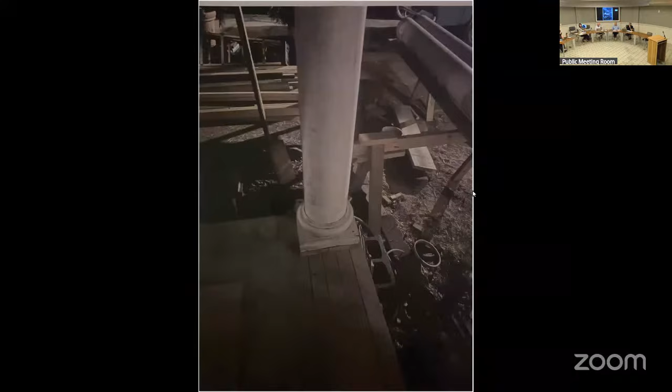If you could, Travis, could you go to one of it's kind of a dark one, keep going. It's a detail of a column. Yes, go to this one. Yeah, if you can see it, that one there, yeah. So, this wouldn't be hard to fix, but you see how this is just a little couple of 2x? There used to be a beam that came and sat right here. That was, usually they're the width of the column. And it's an express beam, and instead this was done, and you wouldn't have to take out a lot of stuff, but if there's a way.

Well, trying to make it simple, but at the very least, this would be a drop beam that's this wide, if that makes sense. It's a little more lumber, but it would get your detail at least closer to what was there, and I think it would feel better on the house. It'd be more appropriate, when you have the inappropriate materials and then the details are not like they were, then it just compounds it. But at least we can get that one detail cleaned up a little bit.

It would take the place of that block that was added above the column that shouldn't be there. Yeah, you have this part that should be there, but someone's added this in where there used to be a beam that ran through. I'm continuously trying to see if there's an old picture in here, and there isn't.

Anyway, I would be okay with the support of this if just staff could work out with her new friend that's gonna build boards to get that detail right. I don't think it'd be that hard. I agree. I don't think that we're setting a precedent based on past, they've earned it, been good stewards of the house, so. Not to encourage anyone to do the work, or, because if this were coming to us and the work hadn't been done, I think the decision would be different. Absolutely.

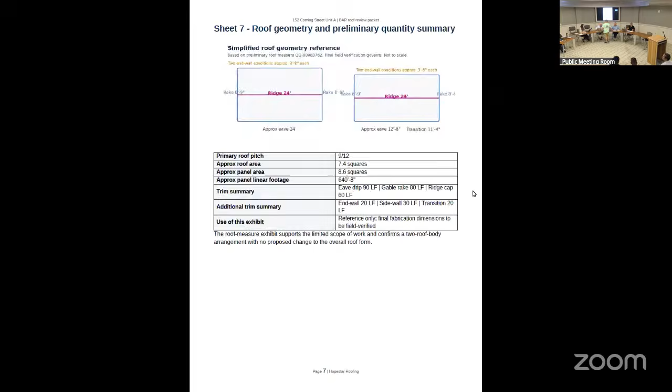Does it have seal effects on it? It looks like it's been... there's a handful, you can just see. Yeah, like what we moved got in here, the valleys, whatever, it looked okay. Like it's been coated multiple times.

Everything's got a lifespan, you know, I mean, I think last time it was that we didn't have enough information on the actual damage. The drone photos, we just couldn't tell, last time. Any questions? Thank you.

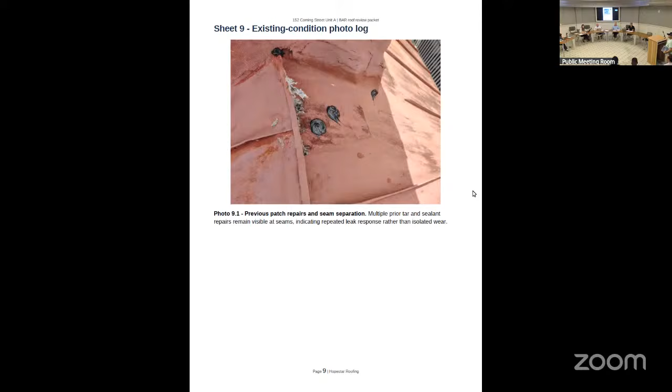Is anyone speaking? No? Frankie? We just had an observation, it was previously denied by you guys in March, so it cannot be overturned. Did you want to respond to or clarify anything? All right, we are in board discussion and a vote.

Yeah, this thing's been coated multiple times and it's got some bad repairs. I can even see the Silflex fabric showing through in some places. I don't have an issue with it. I move for approval.

All right, we have a motion on the floor for its conceptual approval, with final review by staff. I don't think it needs final approval. Okay, do I have a second to Eddie's motion? Daryl? All right, motion to a vote.

Bill? Yeah, in favor. Eddie? Yeah, in favor. Daryl? Yeah, in favor. Chair votes the majority and the motion passed unanimously.

Thank you. You will still need your permit, even though they gave final approval. Yes, thank you, make sure you get a permit. We learned that tonight. All right, very important. It is permit. Important. I have to point that out sometimes.

Agenda item, a lot of 15, 394 Meeting Street. Frankie, if you'll give us an introduction overview of the project, please.

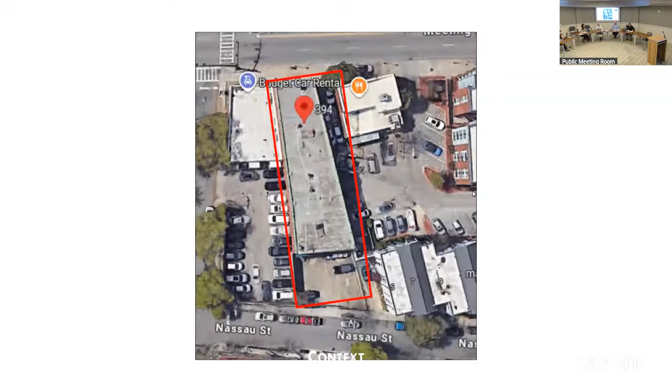Oh, I love the it, cool building. Yeah, 50s, 40s, shed building. And I will turn it over to the applicant.

It's 2000? This dude, I don't know why it says 2000. I think that's about 1940s. Say you're wrong, but it's not. I don't know why it says that. That is not 2000, definitely not.

So, hello guys, my name is Lindsay and this is my partner George. We own Ringio Sign. George was actually just here last night and, here, get an extra week. So we're gonna get to know you guys really well.

So to my knowledge, the proposed sign that we have put in our application to you guys meets all of the necessary preliminary requirements as far as materials, size, mounting, everything like that. So we are basically here to talk to you guys about the possibility of illuminating that sign.

The owners of the building recently did a fairly expansive and extensive remodel of the inside. It's fairly impressive now, and they're getting to the point where they want to extend that to the exterior of the building, to elevate the facade and create and establish a high-end spot for new tenants, office space, and retail. So with that, I'll turn it over to you guys for questions.